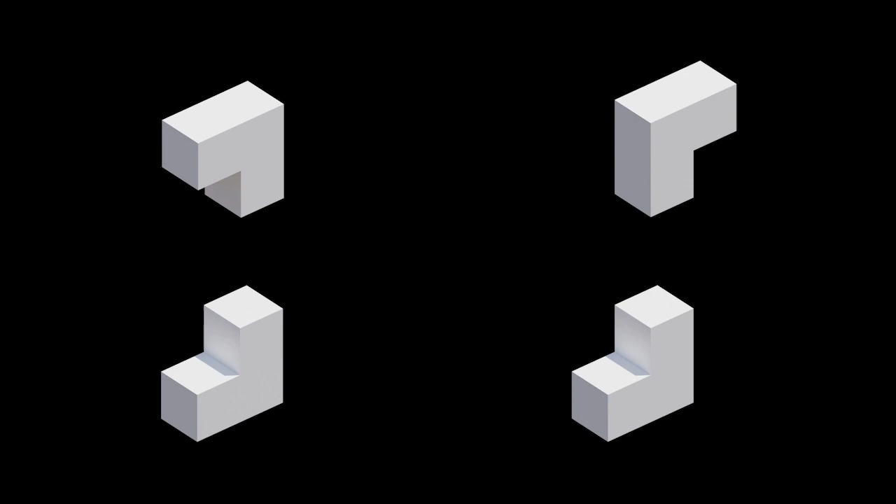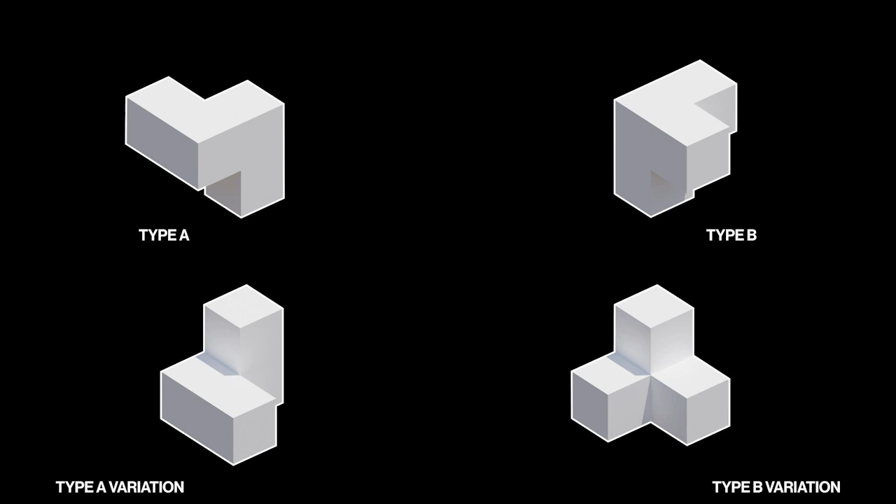To represent spatial configurations related to notions of overlap and interlock, two operations were dissected within the multi-unit housing project: the transformation of two-dimensional tessellated figures to generate a series of distinct forms through hinging and rotating. Two types are produced that interlock in a repetitive manner, with further variations from changing their orientation. The second operation, the intersection of self-similar figures, produces an aggregated triad.

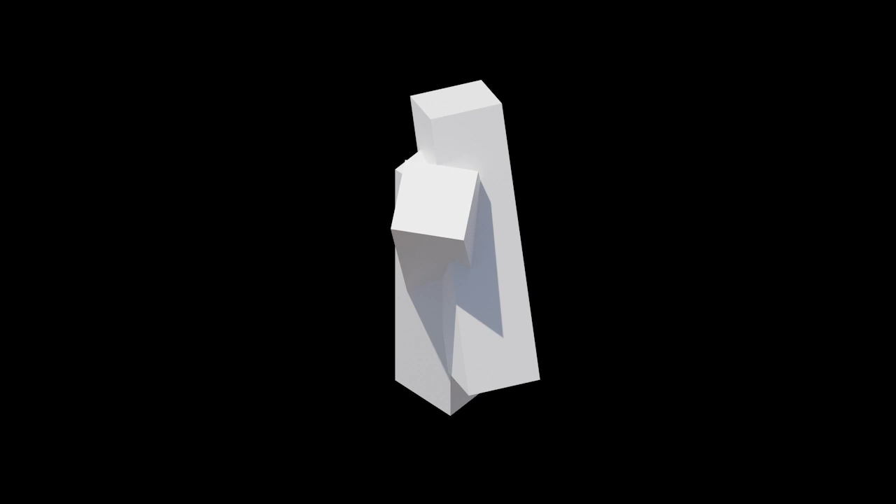Initiating with the concept of a monolithic tower as a strategy for maximizing ground space, two copies of the primary volume hinge and rotate around the central element until a careful suspension is achieved. The three masses are then interlocked to create a single monolith that continues to articulate their individual presence.

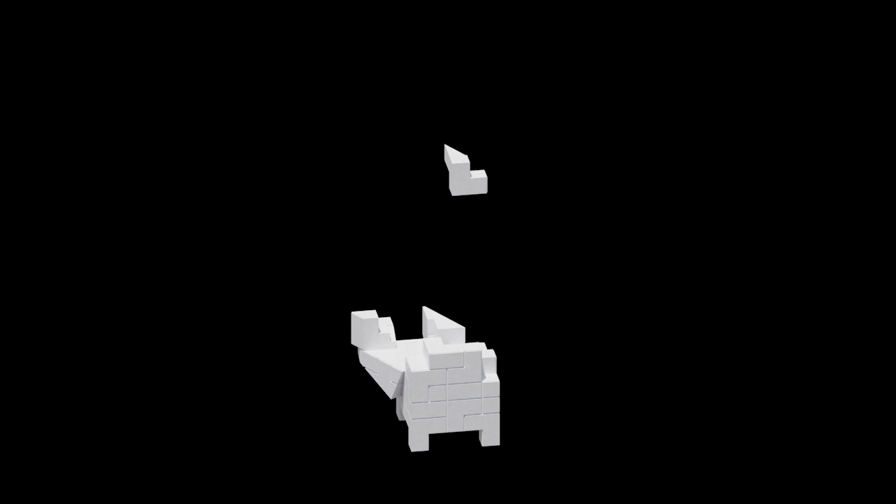204 units are stacked three-dimensionally, conforming to the outline of the massing triad. By packing the units to the perimeter, maximizing sunlight, a large void is created throughout the aggregate. The void is most significant around the intersections of the three towers, where the selective subtraction of units extends it to the exterior.

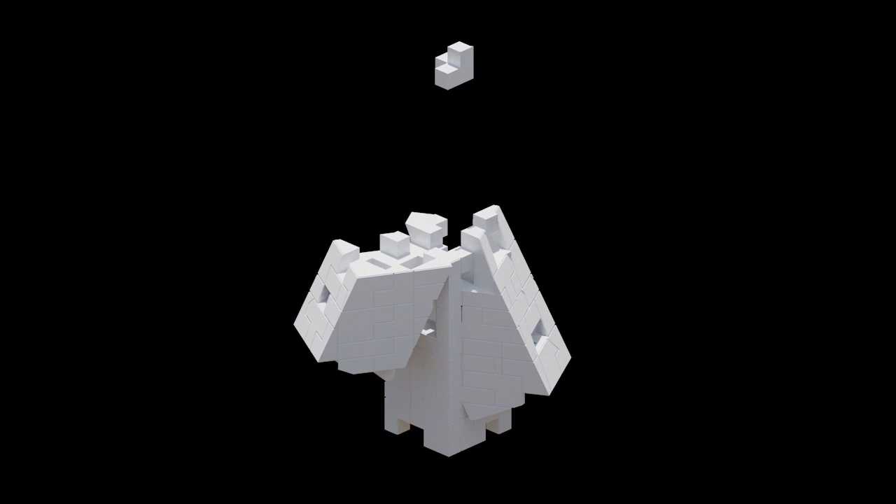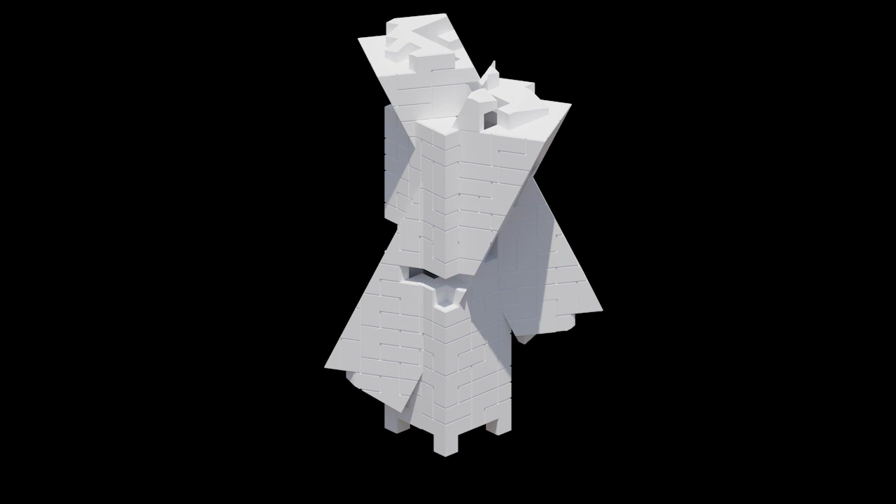The stack builds a total of 24 stories, with large openings in the last few floors to fill the void with sunlight. The complete aggregate becomes a hollow mass, densely packed at its perimeter, but extending exterior space to the very center of the building.

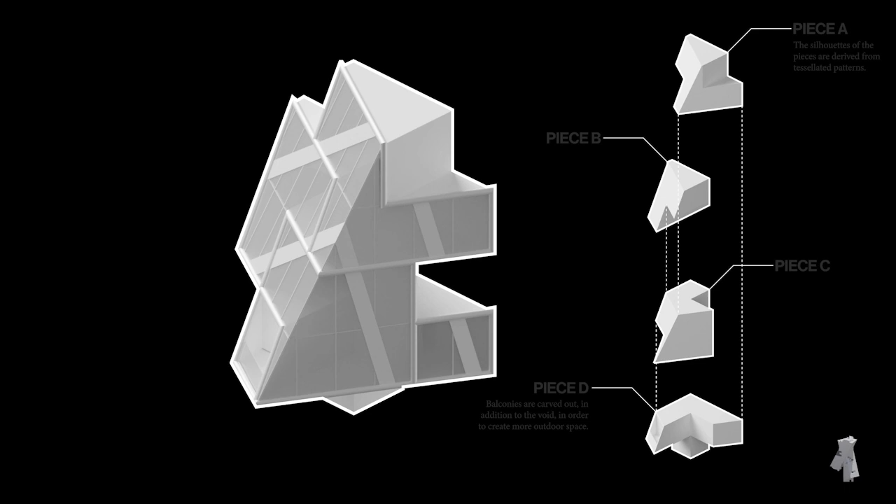Continuing from the concept of the 2D tessellation, the three-dimensional form is rotated, mirrored, and stacked to achieve a tight packing of volumes. Units were selected and developed to better understand the potential interior relationships.

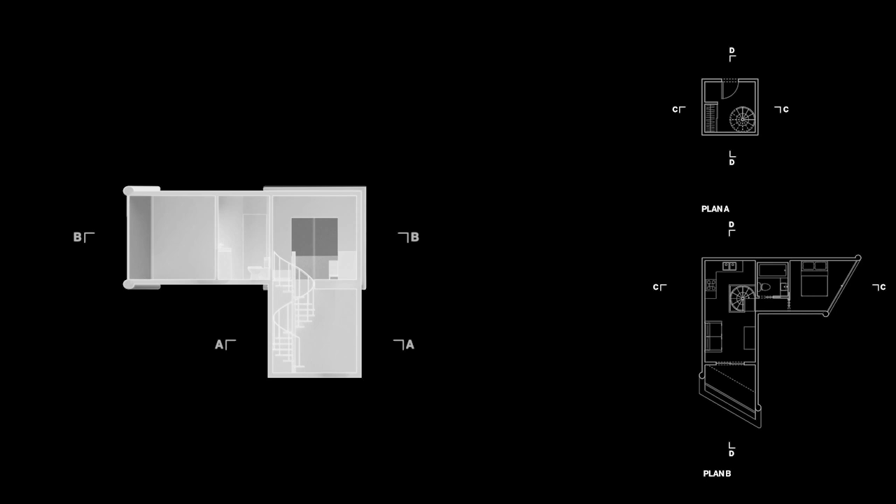Fundamentally, and similar to the conceptual origins of the project, the interior relationships of the units consist of diverging masses that encounter each other at one specific point. As a result, the living spaces are separated across two levels, and the circulation becomes fragmented. Rather than producing a continuous living space, it creates intersections that are densely packed.

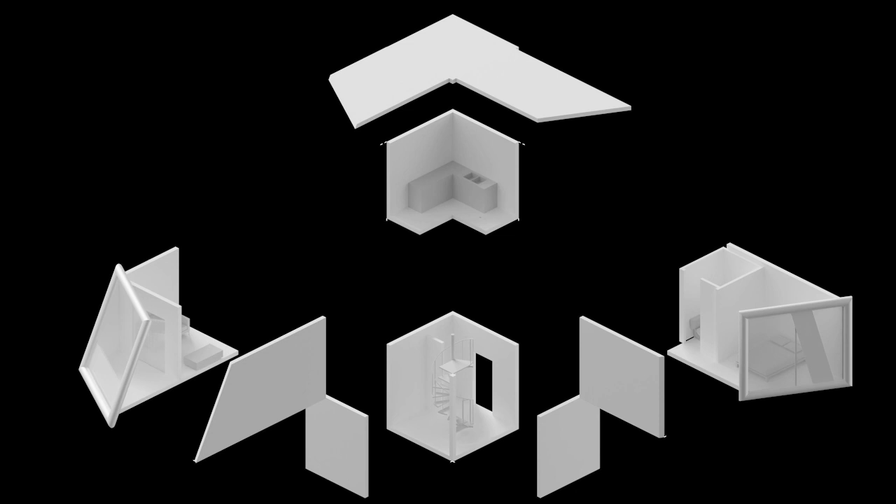As a consequence of the actions performed on the building, outdoor spaces are generated, represented through the carved-out balconies. Although the interiors acquire a unique eccentric form through the aggregation and interior logic, the places where they meet, such as the balconies, remain seamless, concealing the figural language of the initial tessellations.

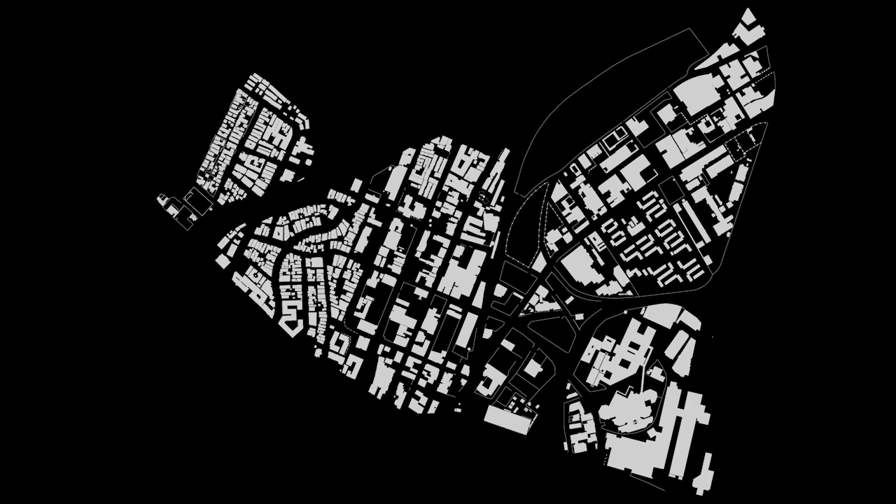Situated on the edge of Chinatown, the micro-unit housing complex promotes the inclusion of public space by manifesting a reduced footprint on the site.

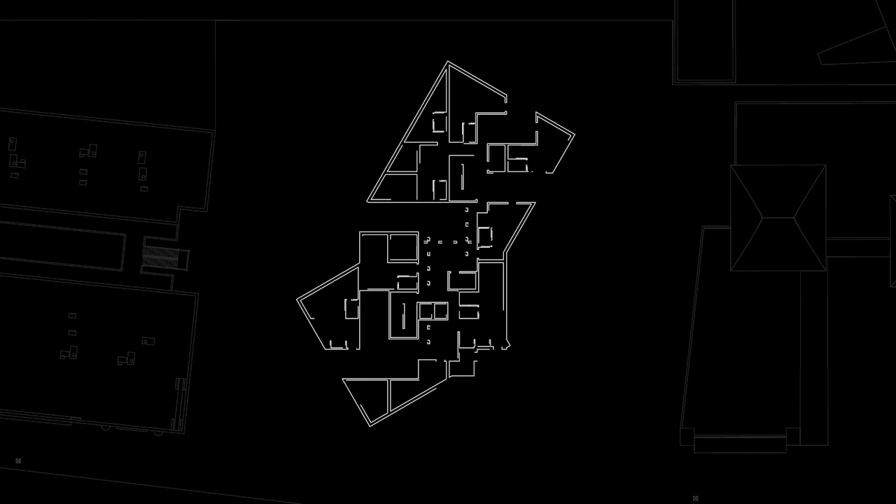The ground level is seamlessly interconnected with the stepped forms of a public plaza and a retail area below. The residential areas, comprised of two-story units, are connected through the large void spaces.

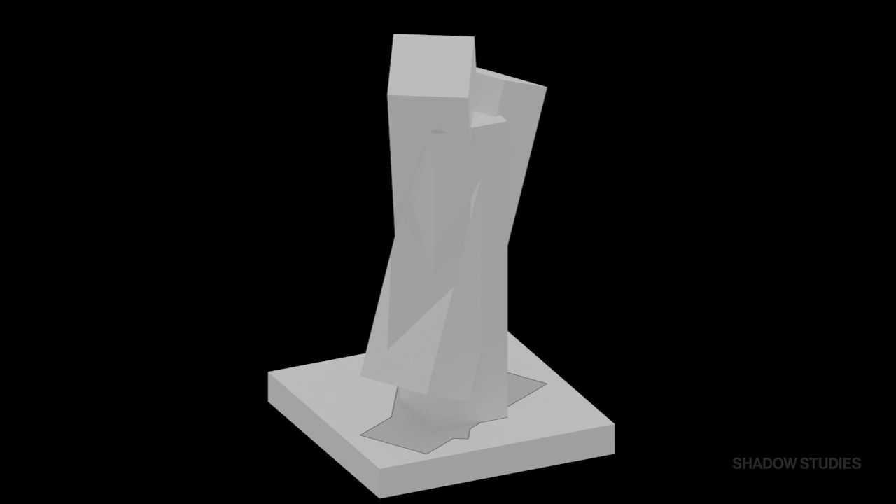5 shadow projection studies were taken at 30-minute intervals on a midsummer day. The overlapping projections created baselines from which a staggered ground was created and scattered with ramps and stairs.

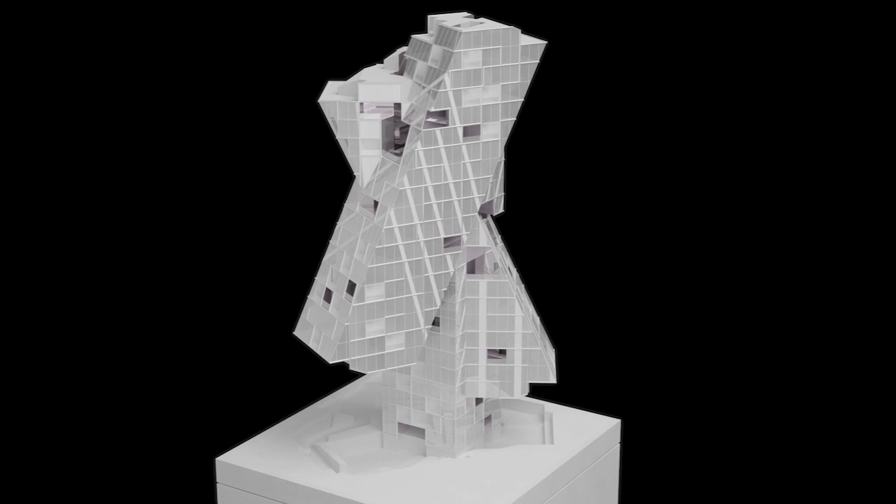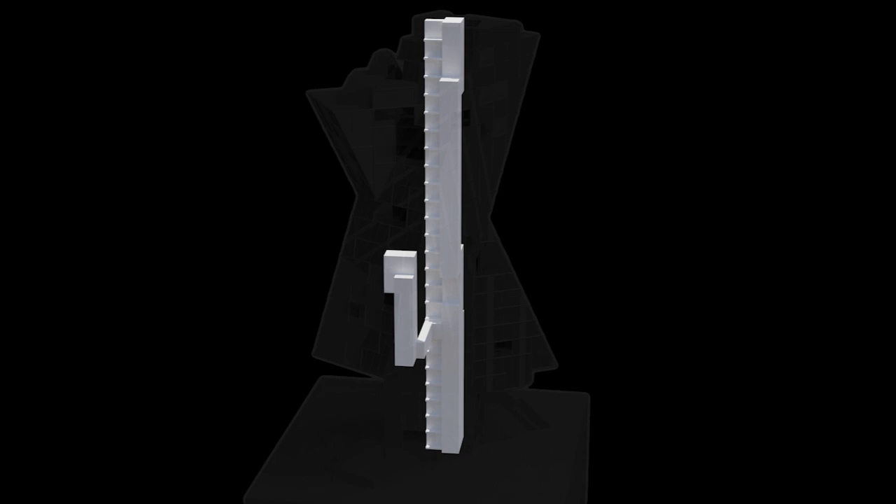The first 7 floors of the building are serviced by 2 individual staircases, arranged in a double helix. They split on the 8th floor, where a secondary egress core branches out to accommodate the largest floors of the triad, while the main core extends across all 24 floors.

Circulation to individual units is achieved through a network of walkways that flank the void walls. Alternating the access floor of the units significantly reduces the necessary number of walkways.

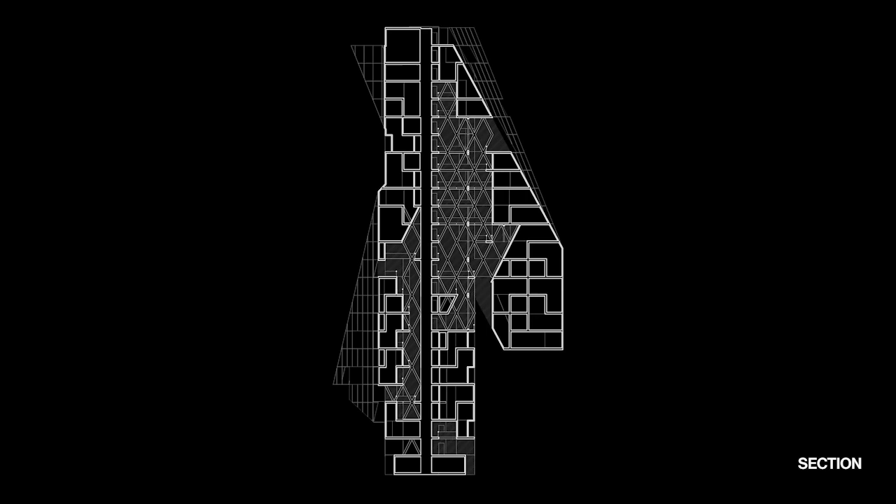In addition to the structural core, a steel lattice frame system populates the void, allowing load to travel through it and suspending the large overhangs. This frame was fit according to the outline of a 4th tower, which subsequently further shaped the void.

The skin of the building, a glossy white curtain wall system, relies on the finish of the materials to create distinction between the intersecting masses, the void spaces, and the units.

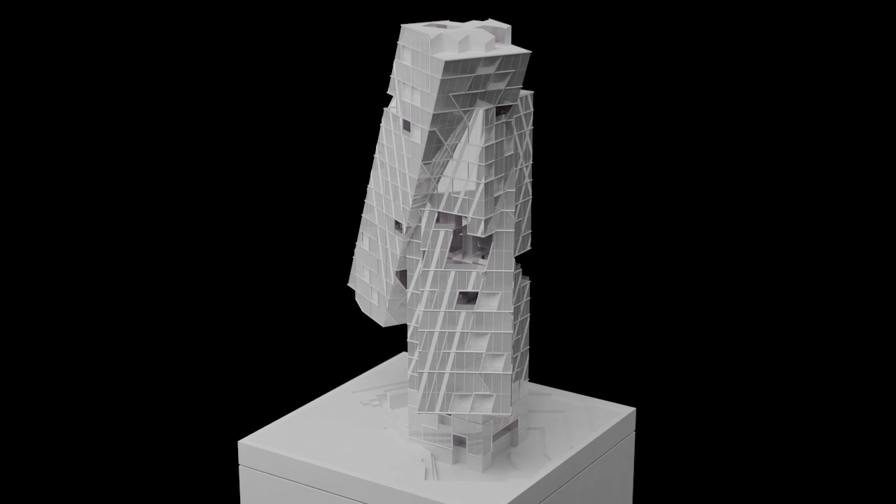The relationship between the large-scale massing and the small-scale unit strategy creates a series of void spaces that attempt to return the site to the public and establish a prominent relationship to outdoor space.